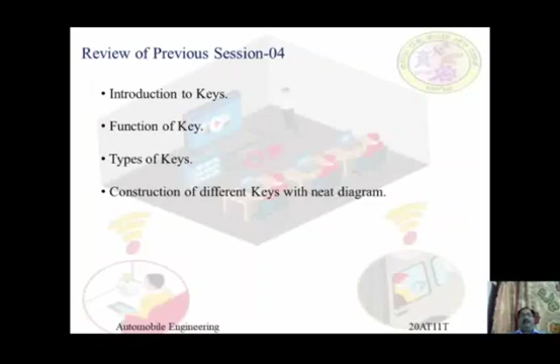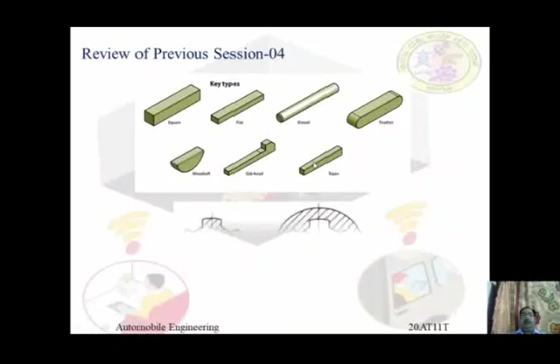In the types of keys, we have studied sunk key, gib-headed key, Woodruff key, etc. Apart from that, we have studied the construction of different keys with neat diagram. So these are some of the keys here: square key, flat key, feather key, Woodruff key, gib-headed key, taper key, and also we have studied splines.

So today in session number 5, the contents are introduction to shaft couplings, requirement of a good shaft coupling, types of shaft couplings, and multiple choice questions, in short called MCQs. In introduction to shaft couplings, why are we using shaft couplings? What are the functions? In requirement of a good shaft coupling, how must a good shaft coupling be? What are the requirements?

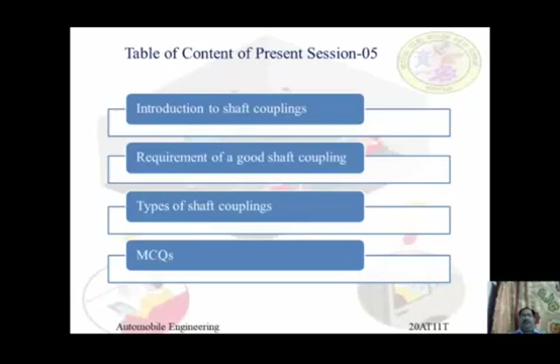Then we have to study the types of shaft couplings, how shaft couplings are classified, and which type of shaft coupling is used for a particular application, along with examples. In multiple choice questions, as you are already familiar, each question has 4 answers. Out of 4, 1 will be the correct answer, so we have to select the correct answer. So let us study one by one.

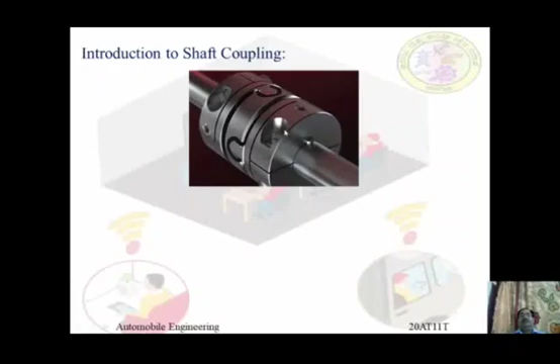Number 1 is introduction to shaft coupling. So here this is our shaft coupling which couples the two shafts. One shaft is here and another shaft is here. These shafts are coupled by the coupling, so that's why it is known as shaft coupling. Coupling is a device used to make permanent or semi-permanent connection of two shafts. See students, this shaft coupling couples only the shafts.

Shafts are available up to 7 meters in length due to inconvenience in transport. That means if they are more than 7 meters in length, it is difficult to transport the shafts from one place to another. So they are available only up to 7 meters in length.

In order to have a greater length, it becomes necessary to join two or more pieces of the shaft by means of a coupling. So the coupling makes a permanent or semi-permanent connection of two or more pieces of the shaft when we require more than 7 meters in length. So this is the introduction to shaft coupling.

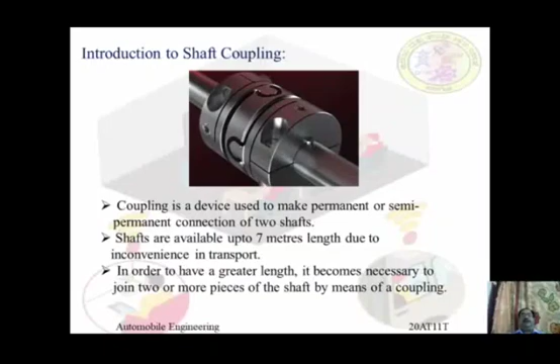Next we will study the requirements of a good shaft coupling, that means how our shaft coupling must be. A good shaft coupling should have the following requirements. Number 1, it should be easy to connect or disconnect. That means when we are joining the two shafts with a coupling, it is easy for the operator to connect or disconnect. It should not be difficult. That is the first requirement.

Second one, it should transmit the full power from one shaft to the other shaft without losses. As we are familiar, when we transmit any power, it may be electrical power, fluid power, engine power in the vehicle, from one place to another or one shaft to other, there will be a little loss. But a good shaft coupling should transmit the full power from one shaft to the other shaft without losses.

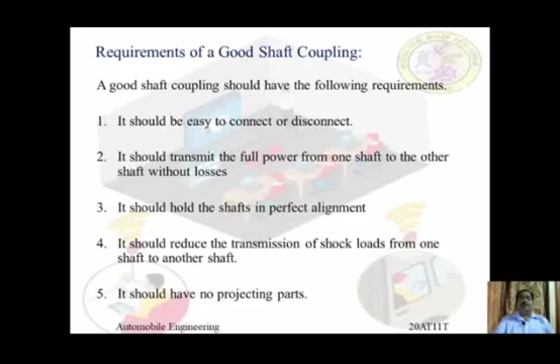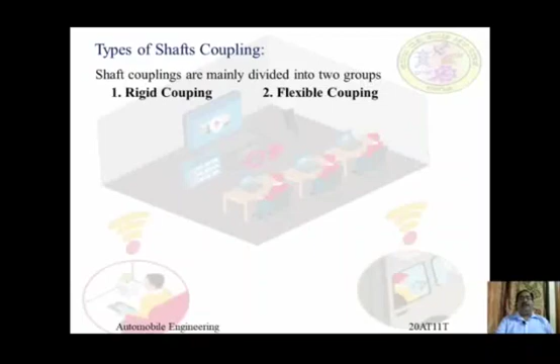Dear students, next we have to study the types of shaft couplings. The types of shaft couplings are mainly divided into two groups: number 1, rigid coupling, and number 2, flexible coupling. So number 1, rigid coupling. It is used to connect two shafts which are perfectly aligned. That means the two shafts must be perfectly aligned; only then are we using rigid coupling.

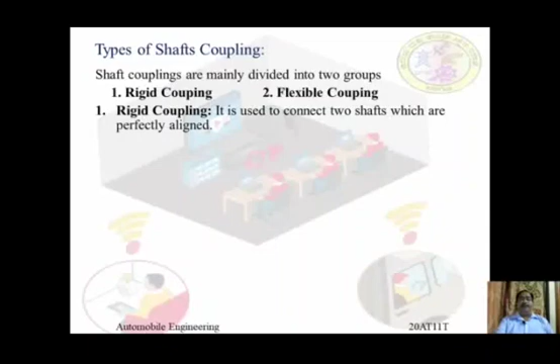So this is the rigid coupling. Here one shaft is fitted and here another shaft is joined with the help of rigid coupling. The examples of rigid couplings are sleeve or muff coupling, clamp or split muff or compression coupling, and flange coupling. These are the examples of rigid coupling.

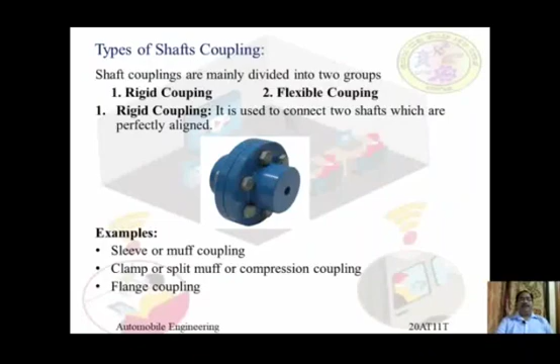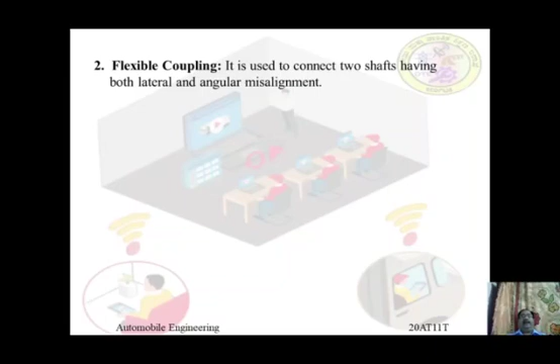Second one, that is flexible coupling. It is used to connect two shafts having both lateral and angular misalignment. So this is our flexible coupling here. So in a rigid coupling, we are connecting two shafts which are in perfect alignment. But flexible coupling is used to connect two shafts having both lateral and angular misalignment.

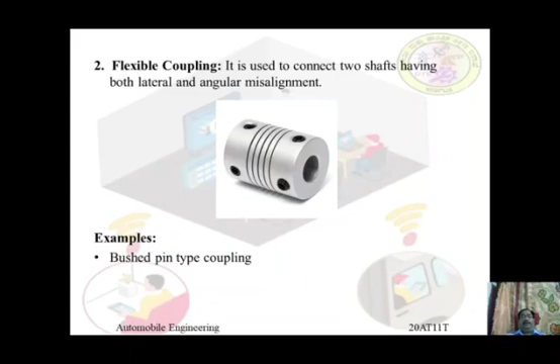So the examples of flexible couplings are bushed pin type coupling, universal coupling, and Oldham coupling. These are the examples of the flexible coupling.

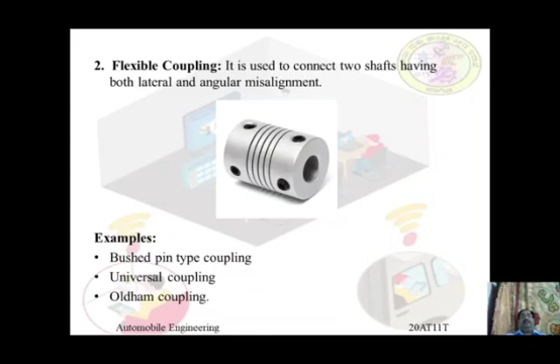Dear students, next we will study the multiple choice questions. As I already explained, in multiple choice questions, simply called MCQs, each question has 4 answers. Out of 4 we have to choose one correct answer. One will be the correct answer, so that we have to choose or select.

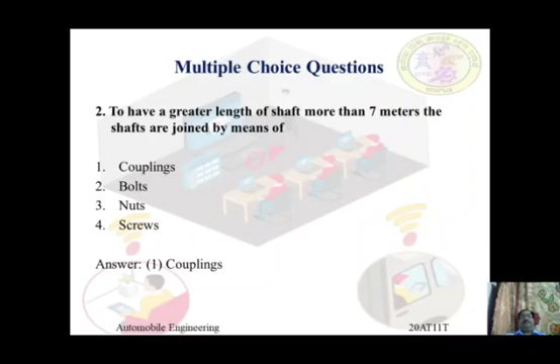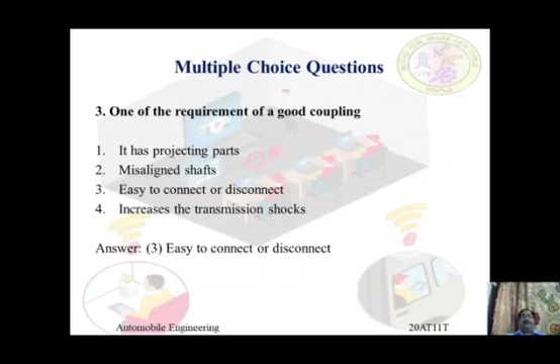Here, options 1, 2 and 4 are wrong answers because they are not requirements of a good coupling. One of the requirements of a good coupling is that the coupling must be easy to connect or disconnect. So here the option is the third one. So third is the correct answer, that is easy to connect or disconnect.

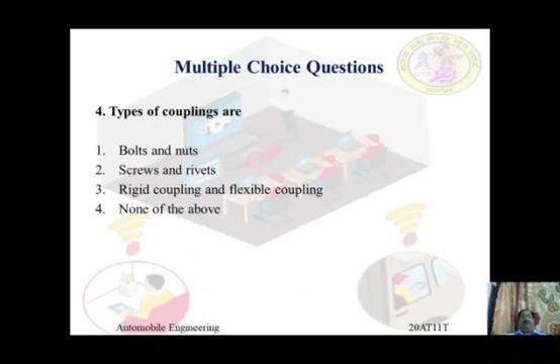So numbers 1 and 2 are types of fasteners, whereas option number 3 is types of couplings. They are rigid coupling and flexible coupling. So the answer is the third one. We have to choose option number 3, that is the correct answer. So rigid coupling and flexible coupling are the types of couplings.

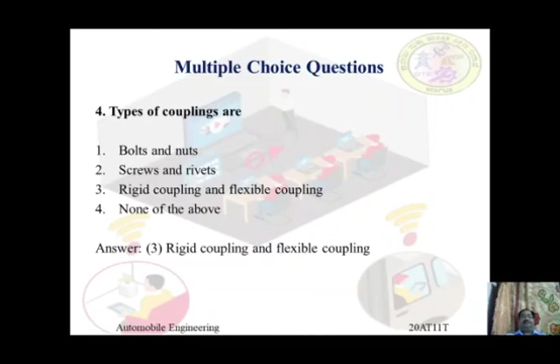Fifth MCQ: it is used to connect two shafts which are perfectly aligned. Number 1, sleeve or muff coupling. Number 2, bushed pin type coupling. Number 3, universal coupling. Fourth one is Oldham coupling.

See students, here options 2, 3 and 4 are examples of flexible coupling, which are used for joining or connecting two shafts which are misaligned. But here the question is, it is used to connect two shafts which are perfectly aligned. In rigid coupling, we connect two shafts which are perfectly aligned. So the sleeve or muff coupling is the example of rigid coupling. So here the option is 1. 1 is the correct answer for this question.

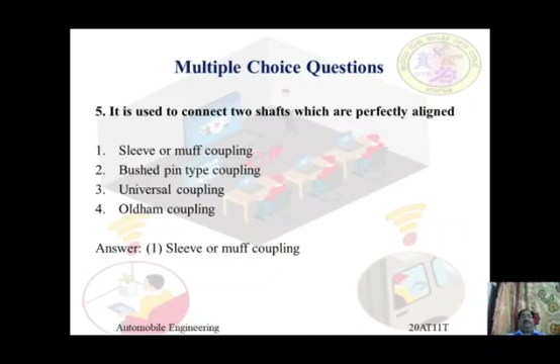Sixth one: requirements of a good coupling are. The options are: it should have no projecting parts. Number 2, it should hold the shafts in perfect alignment. Third one, it should be easy to connect or disconnect. Fourth one, all of the above.

So here options 1, 2 and 3 are the points of the requirements of a good coupling. So here the option is the fourth one, that is all of the above, because points 1, 2 and 3 are correct answers. So here we have to choose option number 4 because it is all of the above.

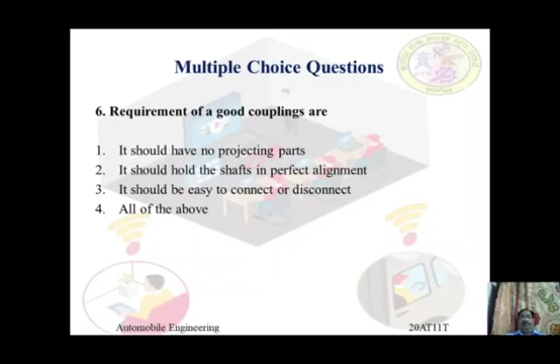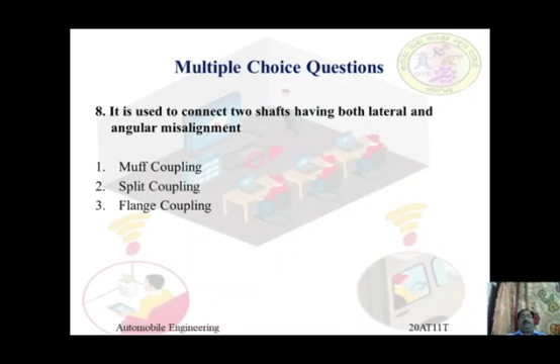Eighth one: it is used to connect two shafts having both lateral and angular misalignment. Options are number 1 muff coupling, number 2 split coupling, number 3 flange coupling, and fourth is the universal coupling.

So dear students, here options 1, 2 and 3 are examples of rigid coupling. Rigid coupling connects only two shafts having perfect alignment. But here the question is, it is used to connect two shafts having both lateral and angular misalignment. So that is flexible coupling. The universal coupling is the example of flexible coupling. So here the option is number 4, that is universal coupling.

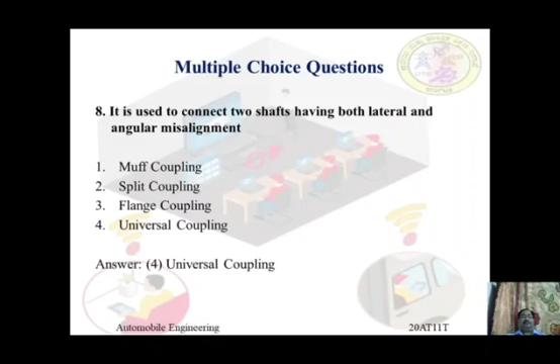Ninth one: Oldham coupling is used to connect two shafts. Number 1, which are perfectly aligned. Number 2, which are not in exact alignment. Number 3, which have lateral misalignment. Fourth one, whose axes intersect at a small angle.

Here, the Oldham coupling is an example of flexible coupling, which is used to connect two shafts which have lateral misalignment. So here the option is the third one, that is which have lateral misalignment.

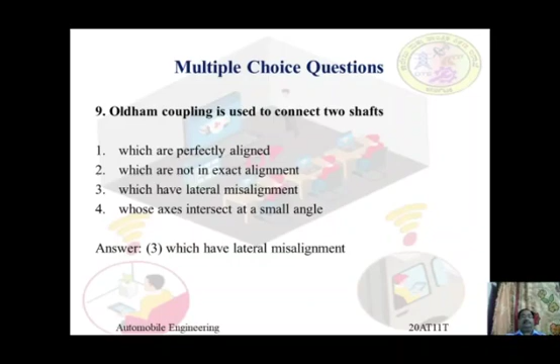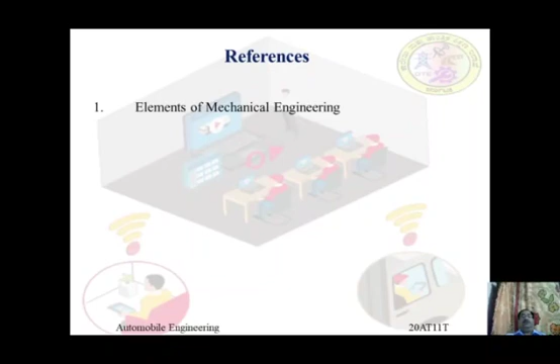So dear students, now I conclude this session. These are the reference books which I have referred to for preparing this session. I hope you have understood this session.